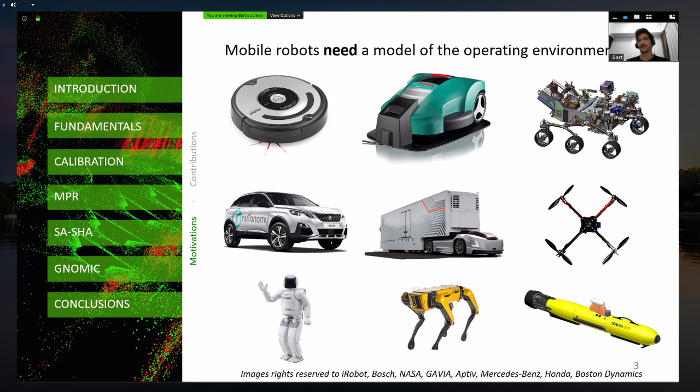Well, let's go with the presentation of today. So, as you may know, we have many applications of mobile robots today. Many of them are really close to us, either in our homes or we see them pretty often on TV. Many of us may have, for example, a robot either for vacuum cleaning or for our gardens. And that works because it's able to build up a model of the world.

Of course, if we buy the cheap one, it will just go around and hit the walls by bumping them. In that case, it's not building up an environment reconstruction, it's just acting and reacting at that level. But an intelligent machine has to be able to build up a good representation of the environment. When things get even more complex and dangerous, in case of goods transportation or human transportation, it's of course mandatory to have a good representation of the environment.

This is true for vehicles on wheels, as cars or trucks. It is indeed true for aerial vehicles, and regardless of whether they are, in case of ground vehicles, legged robots, quadrupeds, or whatever. One of the applications that nowadays is going really strong in research is underwater mapping, and you can see here one example of a robot for underwater SLAM.

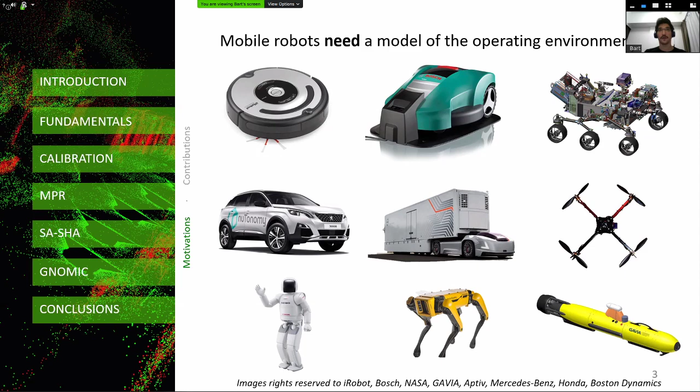So what am I interested in? Building systems that are able to interact with the environment, and this model requires some steps to be followed. First of all, we have to calibrate our platforms, where calibrate means knowing exactly the intrinsic and extrinsic parameters of the platform. The intrinsics, as you have already studied in vision, for example, a camera has a camera matrix, with information about the number of rows, number of columns, the focal distances. Those are intrinsic parameters of a platform, where by platform I mean both the robot itself and the sensors it is equipped with.

Then, of course, we need to know the extrinsics of the sensors, meaning that, imagine we have a car, we want to know where a certain sensor is located on the car.

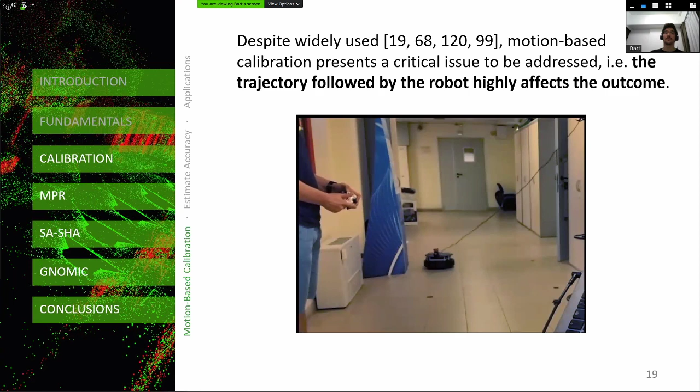Well, in the state of the art, there are many approaches for calibrating a platform. A couple of them, pretty famous, meaning they are cited a lot, are based on following a certain trajectory. Meaning that, for example, you take your robot, you measure on the ground some distance, and given that, you run your robot in this square path, for example, and measure the reading of the odometry and compare it with the distance you have measured. Well, this may work, of course, but if you want a really high level of precision, you need to get the idea that the trajectory that you follow with your robot highly affects the outcome of the calibration.

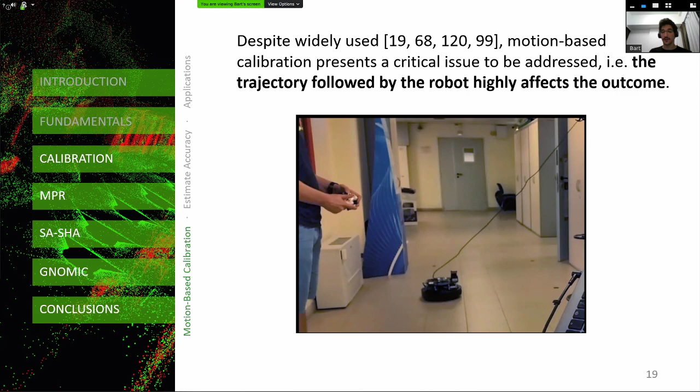So what we wanted to do is to analyze actually the information. If you remember a bit the introduction on least squares, we have this H matrix, the Hessian matrix, that actually stores the information. So you can see it as a multidimensional hyperellipsoid, where the dimension depends on the number of parameters you are estimating. So in case of our platform with many sensors, we have more or less 15 parameters, and in this case we have a 15 by 15 matrix, for example.

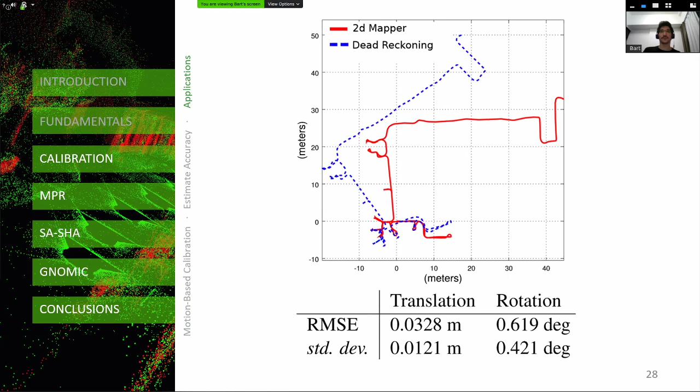As you can see, there is an error close to the 0 coordinate, so at the beginning of the trajectory, but the rest of the shape of the trajectory is pretty close to the original. Of course, you are not expecting a dead reckoning system to be accurate. That is meant to be a measure of prediction for the motion and a really good prior for mapping, but not more than that. So these results are really good in terms of dead reckoning.

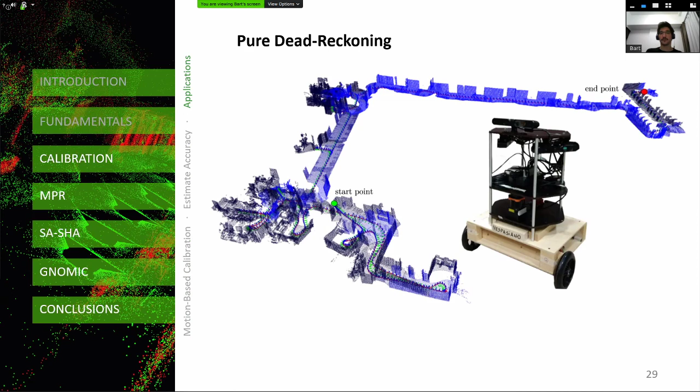And this is the 3D map reconstructed just by using dead reckoning again. So once you are done with the calibration, once you have the extrinsic parameters of the platform calibrated, you can start to map the environment. You may have different sensors. You may have an RGBD camera, a 3D LiDAR, a 2D LiDAR, whatever.

So one of the most prominent approaches, even though there are tons of approaches in the literature in the last 20 years, even more, was dense visual odometry. And we were really interested.

They're asking how useful is sensor fusion in this kind of application? In this kind of application, you mean mapping or calibration? I think they refer to the calibration. I'm not sure exactly. If the student can confirm. Well, let's say that I'll try to answer for both. Yeah. Okay.

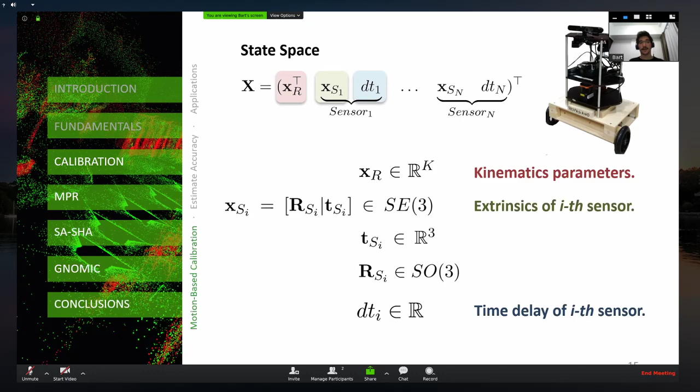Sensor fusion in calibration is pretty important. With this set of sensors, we are doing what is called motion-based calibration. So we are comparing trajectories obtained by running visual odometry on the camera, or running scan matching on the LiDAR, with the dead reckoning, and based on that we can establish the transform of the relative pose. Of course, LiDAR is usually more precise than the visual odometry that can be obtained with a camera.

So in that case, by fusing the information, meaning putting both the camera and the LiDAR information in the same optimization, linked so that the two poses are tied to each other, since we assume camera and LiDAR do not move with respect to each other, the more precise estimate from the LiDAR also helps the estimate of the camera pose during the optimization. So in this sense, fused information helps a lot in terms of accuracy.

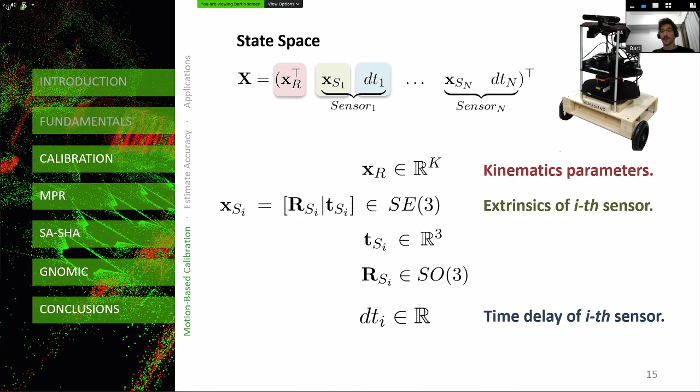For the other part of the question, having registration, visual odometry or mapping with multiple sensors helps in specific cases when some sensor cannot work. For example, having both a LiDAR and a camera on your robot helps in case your robot moves from a room with a lot of light to a room with no light at all. You are not able anymore to track your features, because lighting changes really affect visual odometry and mapping with cameras. So in that case, LiDAR helps.

In case you have, depending on the LiDAR application, fog or this kind of phenomena, you may find advantages in using radar, for example. So having fused information from many sensors always helps. And that's an answer that is true both for calibration and for mapping.

Of course, with too much information fused together, you have to be good at balancing it, meaning that you will end up with a single optimization where each of these sensors has its own weight, and you have to weight them based on the confidence you have in that sensor. I would trust a LiDAR more than a camera, for example, but it actually depends on the application.

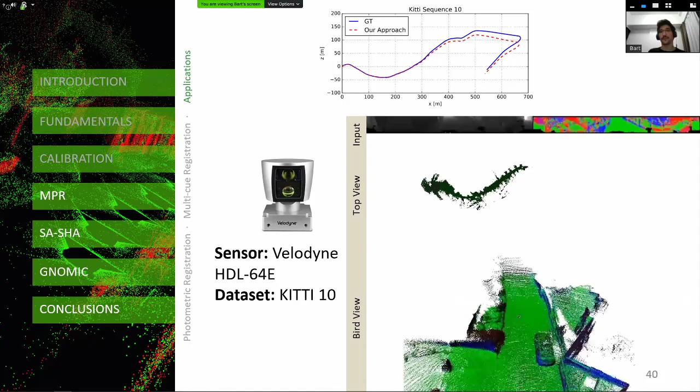And it worked, in the video I was showing before, with a full 3D LiDAR, the one that is usually put on cars. This one is from Velodyne. There are many companies out there nowadays that produce this sensor. And you see how well the clouds are aligned and how fast the trajectory is computed. This is from the KITTI dataset, pretty well known in the SLAM community for benchmarking SLAM approaches.

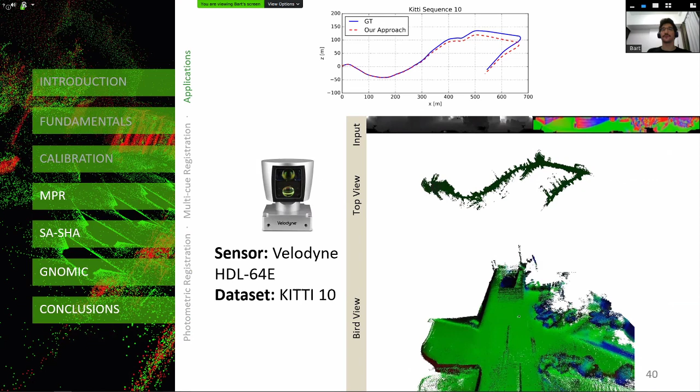How does it help or not? And how does it change in terms of computing the error function and solving our least square problem?

Let's say we can call these features — points, lines, and planes — as matchables. There is something in common between them. If you remind yourself what a quadric is, you can see how all these primitives can be represented as degenerate quadrics. For example, a point can be seen as a sphere with no radius, a line can be seen as a cylinder without radius, and a plane can be seen as two planes with null distance. So three kinds of quadrics degenerate to this matchable representation.

By representing a matchable in terms of centroid — the point P, direction, meaning how the shape is oriented in space, the rotation — and an activation matrix lambda, we can end up not changing our algorithm at all, just by changing the representation of the features. With this activation matrix, we just change the components we want to work on or not.

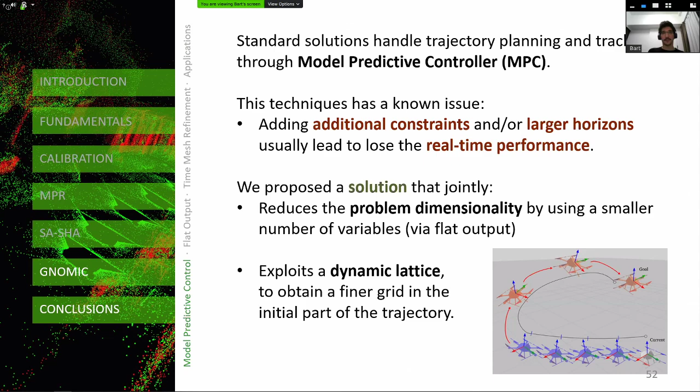First of all, our dimensionality reduction was done using flat output. I assume you're familiar with that, at least from the autonomous and mobile robotics course. Our state here is composed of all the poses of the trajectory and the inputs to get to those poses. What we wanted to do was improve the quality of the trajectory without losing too much in terms of real-time ability to solve the problem.

So the theory of MPC says what you should do is compute the trajectory and the input, take the first pose, compute the input to arrive at that pose, discard the rest, and recompute. Of course you can cache values and do optimizations, but that's the theory of MPC: compute everything, take the first step, recompute everything.

So our idea was, what if instead of having a uniform trajectory, we have something denser at the beginning and more sparse or coarse at the end? What we did was take the full problem and scale it down, considering just the first step of the solution. Then we compute a discretization error using a higher-order approximation, and if the error is too high at, say, the second step, we insert another step by interpolating.